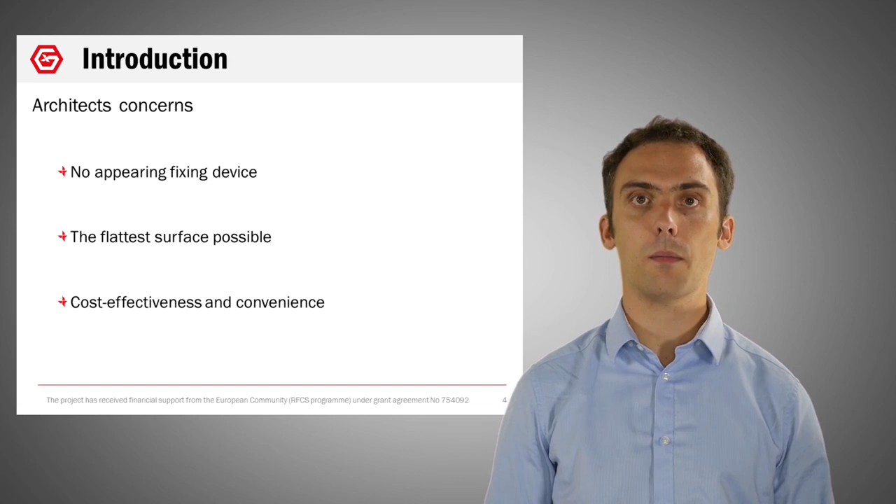Steel is a light, resistant, and competitive material. This is why it is so often used in the construction industry, particularly industrial and agricultural buildings. But traditional steel envelope products suffer from this cheap industrial image. To provide solutions for higher quality or premium buildings, architects asked manufacturers to work on solutions offering no appearing fixing device and the flattest surface possible. This had to be done while preserving the cost effectiveness and convenience of steel products they liked for industrial and agricultural buildings. They wanted the cheapest profile possible for their building to project the most upscale appearance.

Another advantage of using steel is that this material offers numerous possibilities for the realization of the joint, especially compared to the only tongue and groove wood permits. Here are some examples of the most common joints you can find on steel interlocking planks.

Chevron joint is the simplest shape of joint for interlocking steel planks. Clip joint is one of the most common and resistant shapes of joint. Lock joint enables realization of chained joints that can be asked by architects. And gutter joint is really resistant but not convenient.

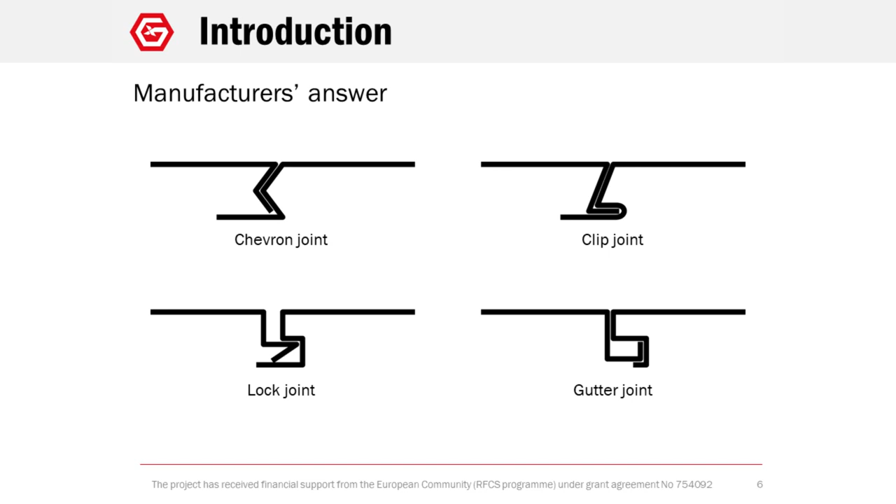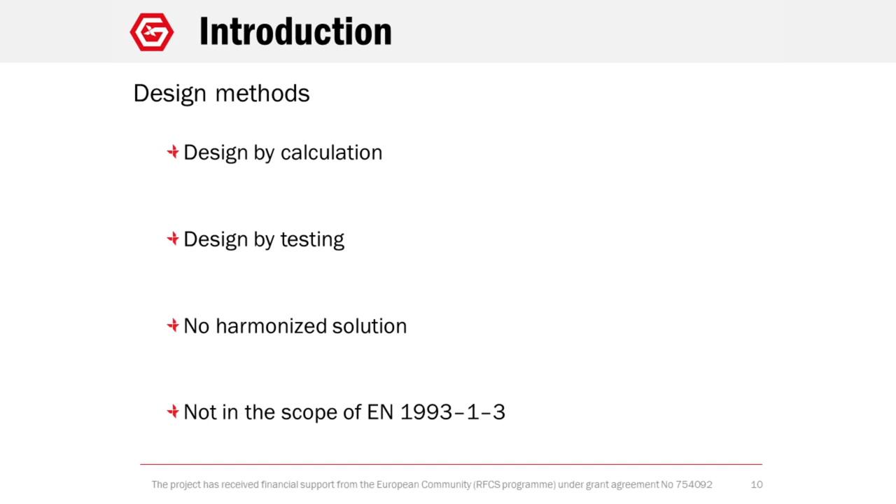During the redaction of Eurocode 3 Part 1.3, these profiles were not included in its scope. Therefore, before the GRISPE and GRISPE Plus projects, no harmonized solution existed at a European level to evaluate their resistance, whether by calculation or by tests.

The tests could be performed in a vacuum chamber or using timber blocks to apply punctual loads with various repartitions depending on the country in which they were performed.

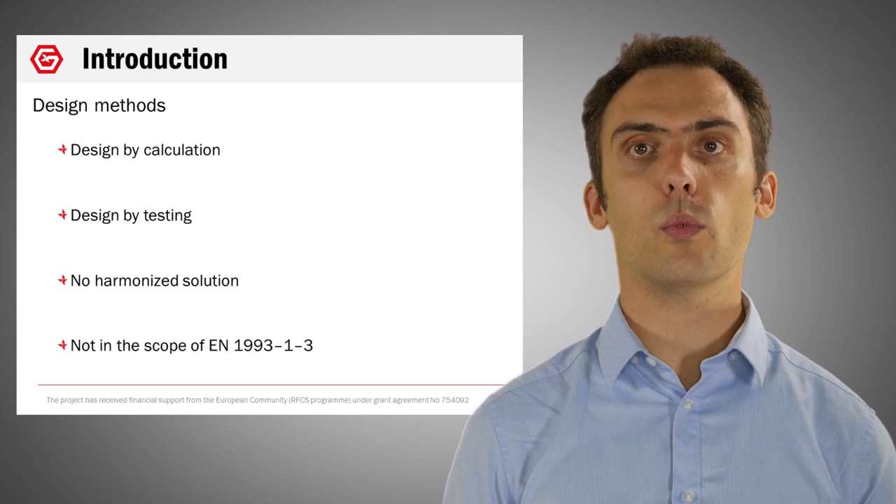Under suction loads, a typical failure mode occurs for interlocking planks. Since only one edge of the joint is fixed, the free edge gradually goes out of the joint, resulting in the dislocation of this last.

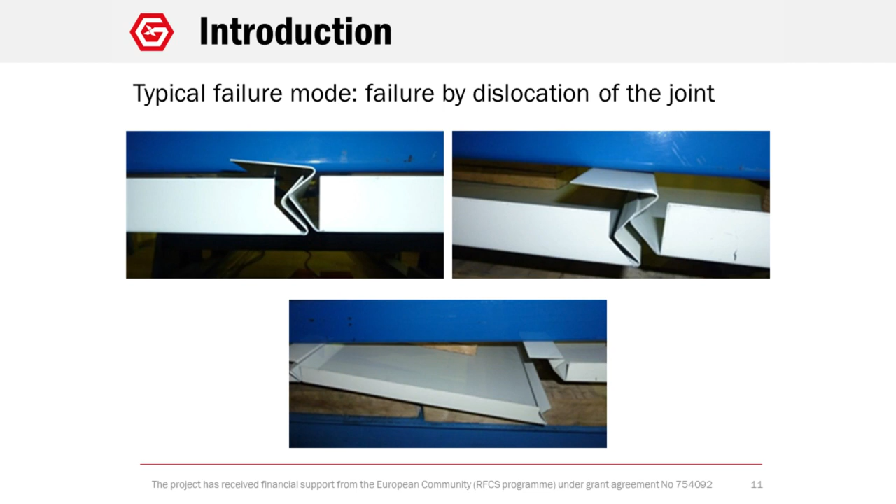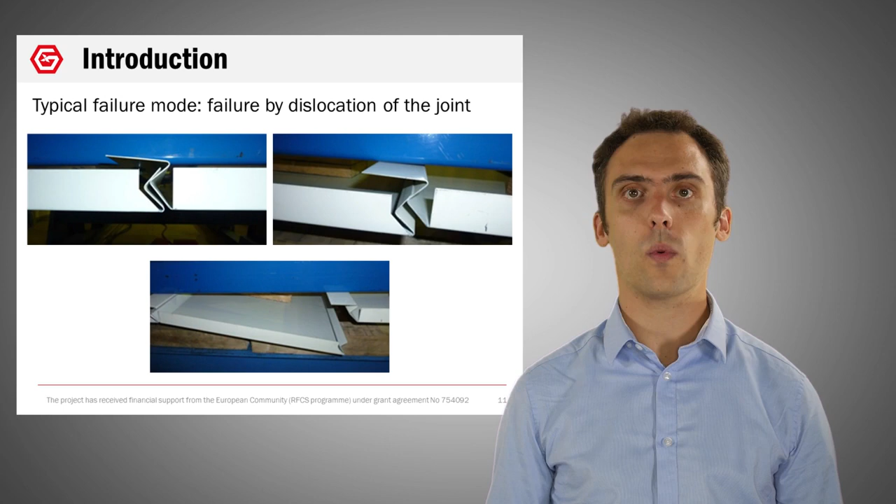This behavior is the most common when tests are performed using timber blocks, even when the span is not so important. We will see that it is not so obvious when tests are performed in a vacuum chamber.

Now we are going to see what tests were carried out during the GRISPE project and what results we used to develop the design method that will be presented thereafter.

Two different profiles were tested within the GRISPE project. The first one is Cladeo 300 from Bacacier. This profile has a useful width of 300 mm for a height of 30 mm.

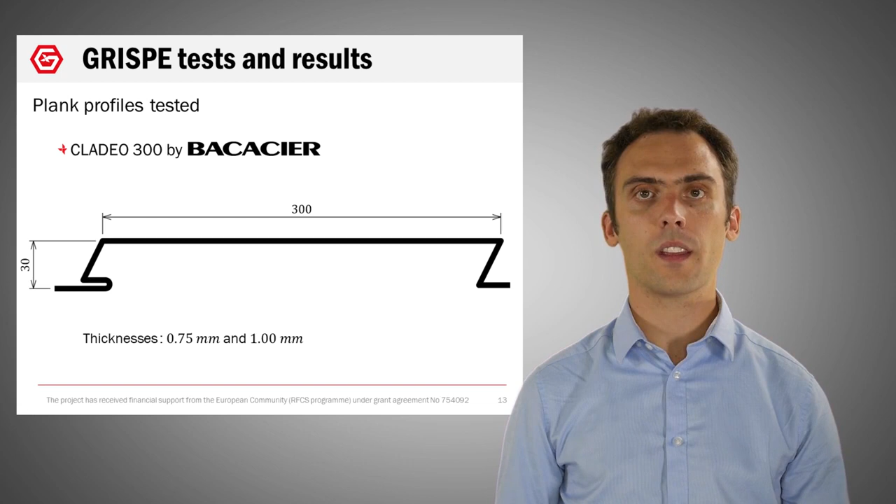All tests were performed in two different thicknesses, 0.75 and 1 mm. The other profile tested was Zephyr 300 from Joris Ide. You can see that this profile has the same dimensions as Cladeo 300. The only difference between the two profiles is the shape of the joint: clip joint for Cladeo and chevron shape joint for Zephyr.

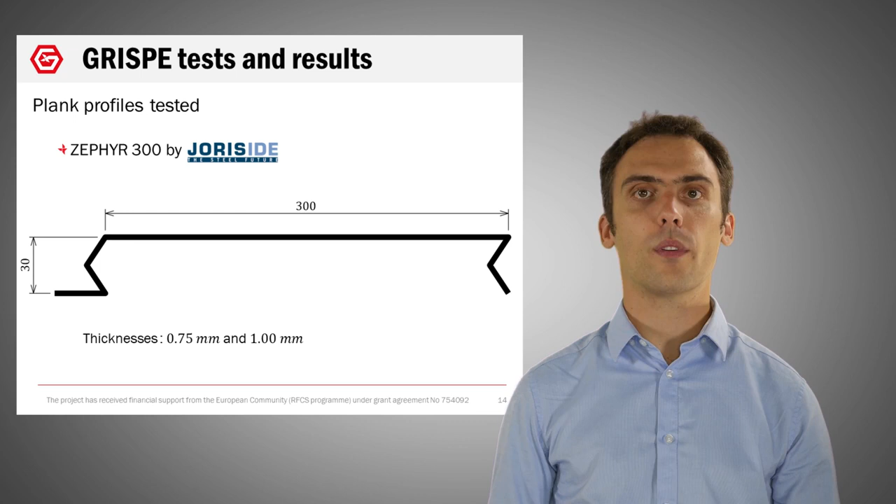These profiles were chosen because they are the most common on the market and because they have the same dimensions. Once again, all the tests on this profile were performed in both 0.75 and 1 mm thicknesses.

Flexion tests were realized in a vacuum chamber as allowed by Annex A of Eurocode 3 Part 1.3. They were performed and analyzed according to this document.

For each test, 5 planks were assembled. You see the sensors that measured both vertical and horizontal displacement. These measures were done on the central plank.

Horizontal displacement was only measured for suction tests. The aim of these measures was to get a better understanding of the dislocation of the joint.

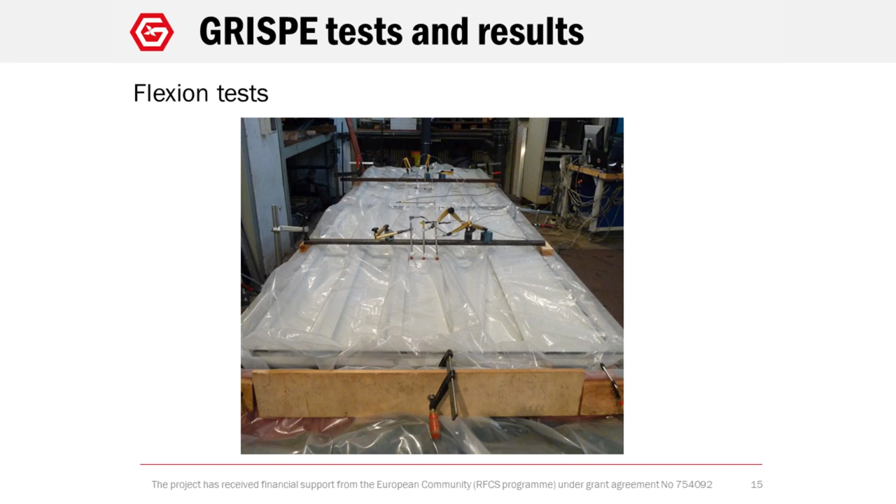Due to the plastic foil needed to airproof the vacuum chamber, the results were unusable. We will see later that we found an analytic way to evaluate this phenomenon.

Another important point is that support reactions were measured by load cells.

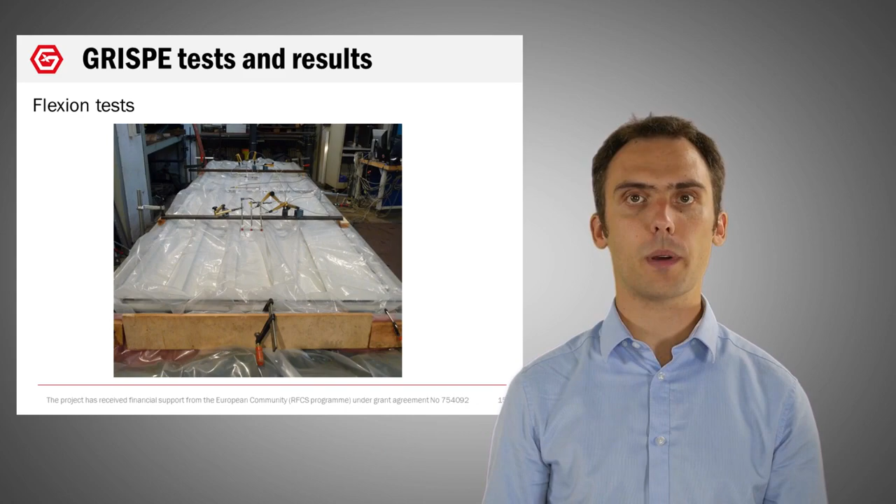The aim of these tests was to develop formulas to get the characteristic moment resistance by calculation.

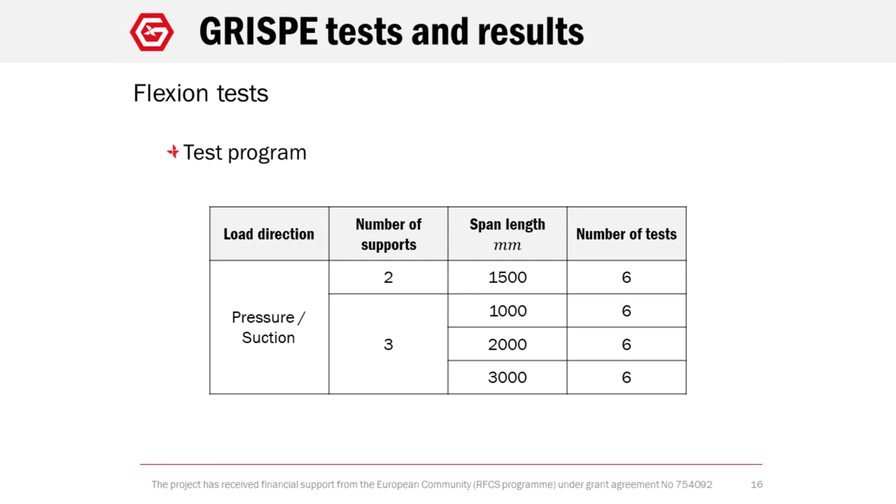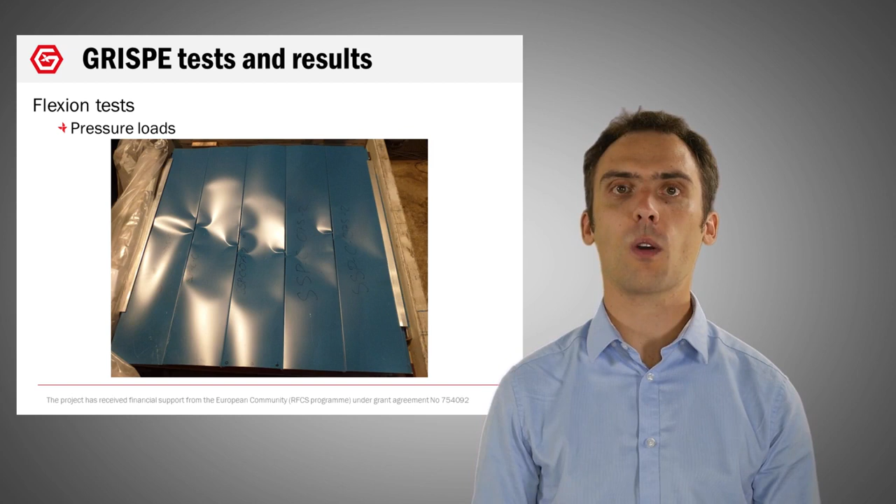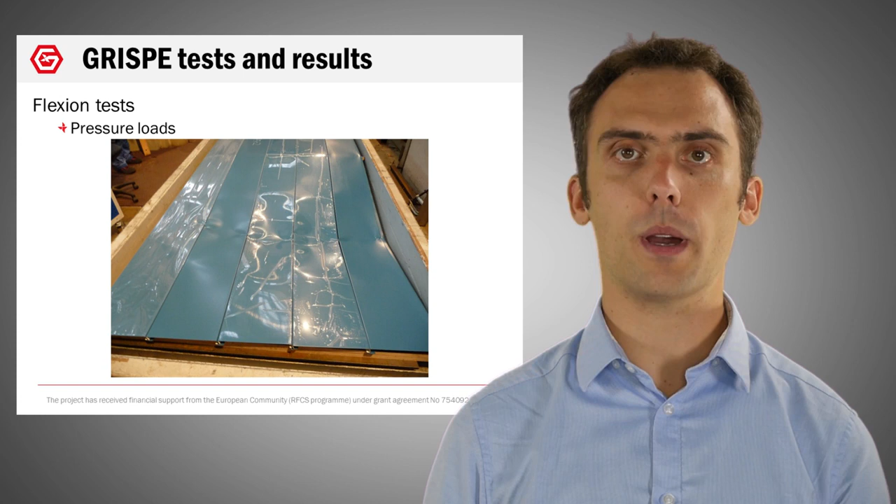On this picture, the failure of a double span sample under pressure loads is shown. Once again, the failure occurred by local buckling of the flat flange in midspan.

For pressure tests on double span configuration with a distance between supports of 1 meter and 1 millimeter thick profiles, the maximum capacity of the vacuum chamber was reached without failure of the samples. You see here that interlocking planks can handle a great deformability before failure.

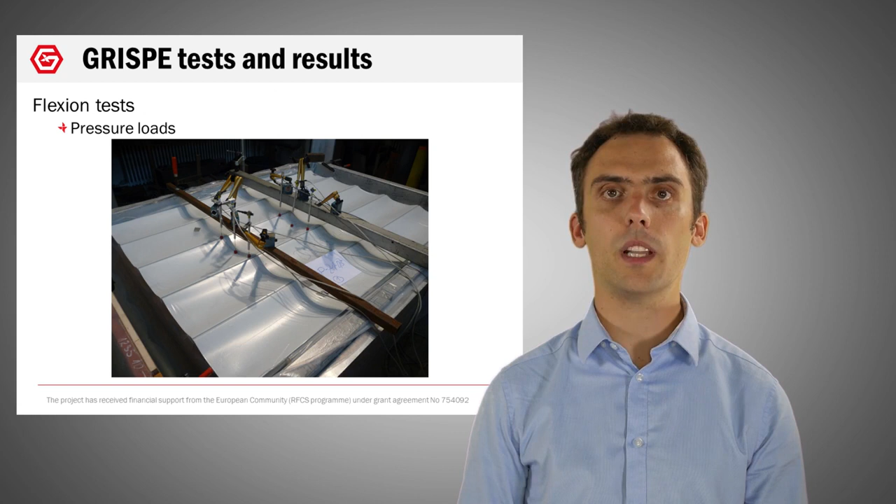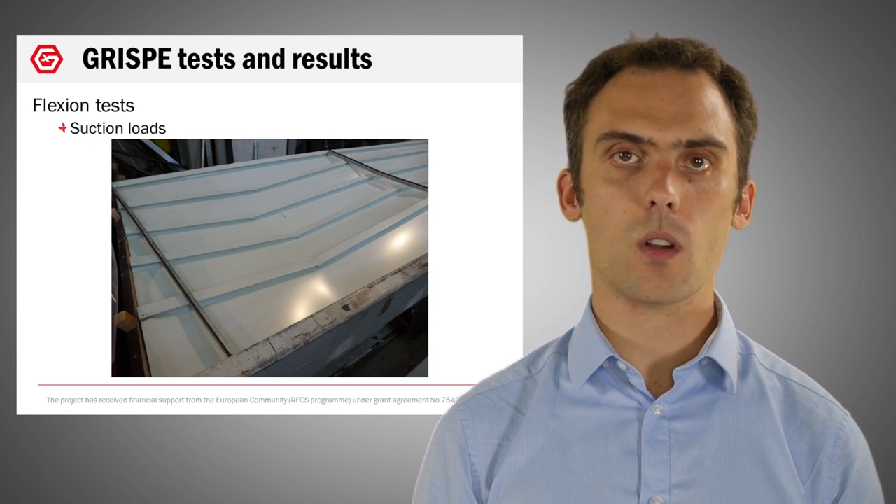This means that when performances are evaluated on the basis of tests carried out using timber blocks, they may be underestimated. Indeed, wind loads are uniform loads, and performing tests in a vacuum chamber is a more realistic way to simulate these loads than to apply local loads by use of timber blocks.

Even if some samples failed by local buckling of the joint, you see now that failure by dislocation occurred on other samples when the load applied was too important.

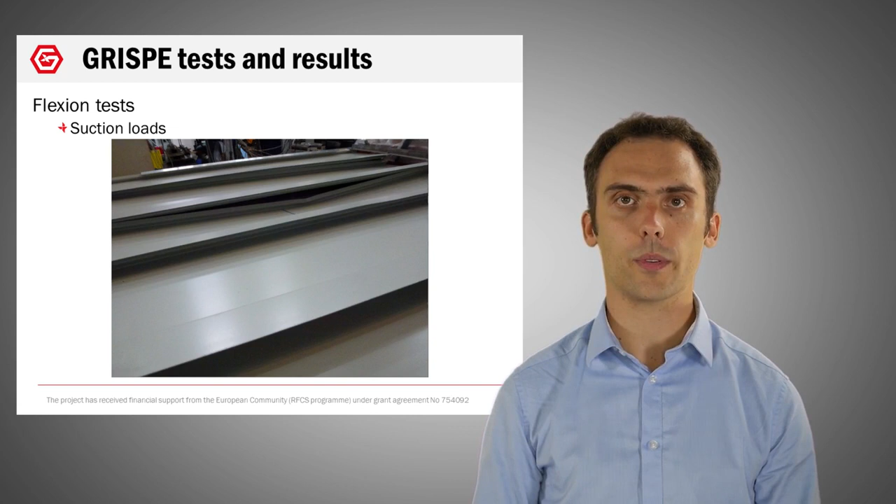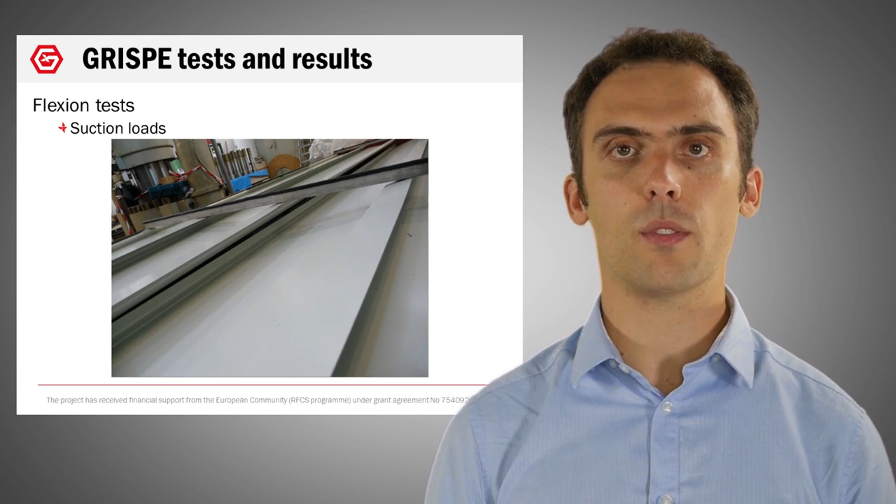On this picture, you see another example of failure by dislocation. We will see later how the maximum bearable load before dislocation can be determined thanks to an analytic approach.

Indeed, the central support reaction measure is about twice the reaction on both end supports, while theory tells us it should be more than 3 times.

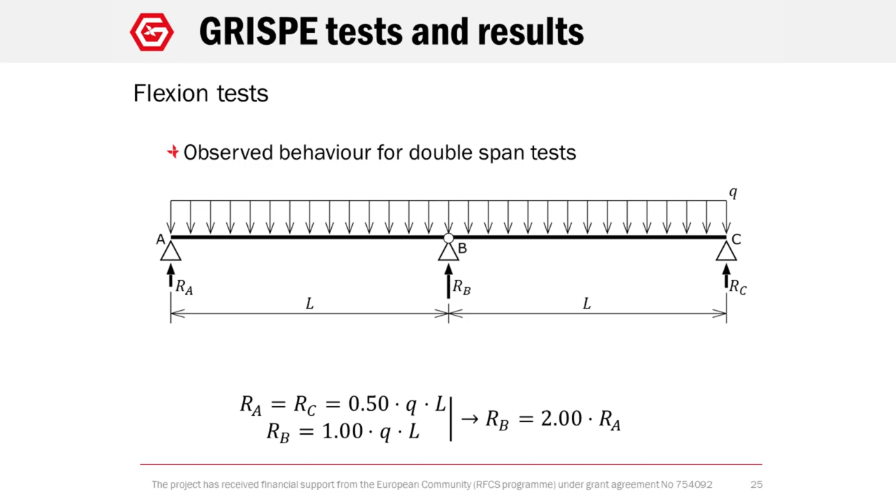End support tests were also realized to see if the actual formula given by Eurocode 3-1-3 can be used for interlocking planks. You see here the setup of these tests.

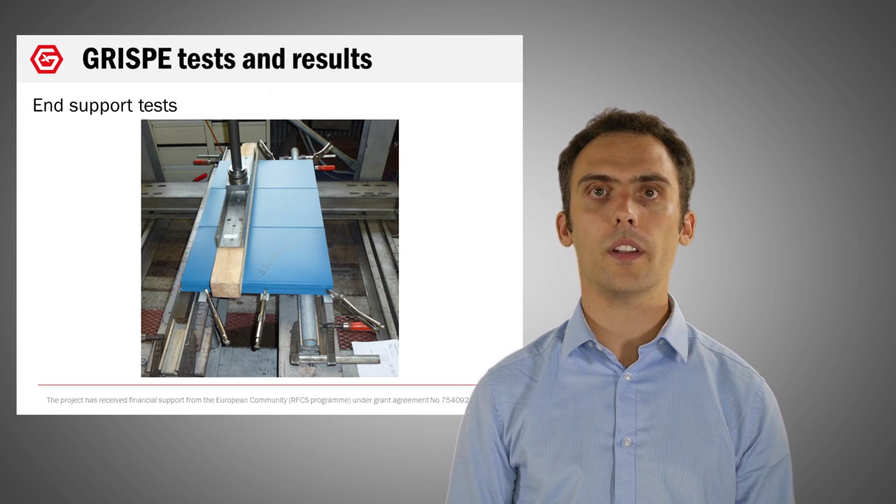3 assembled planks were tested according to Annex A of Eurocode 3-1-3. The test program given here is the one that was performed for both Cladeo and Zephyr profiles in both 0.75 and 1 mm thicknesses.

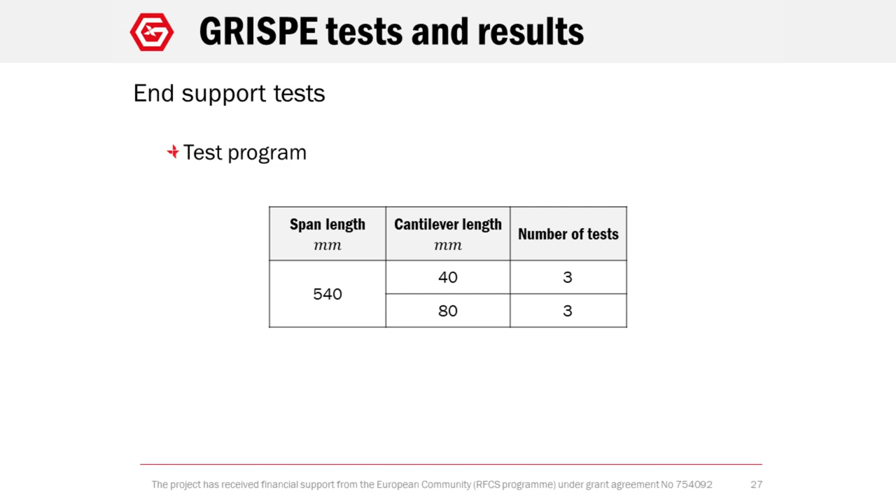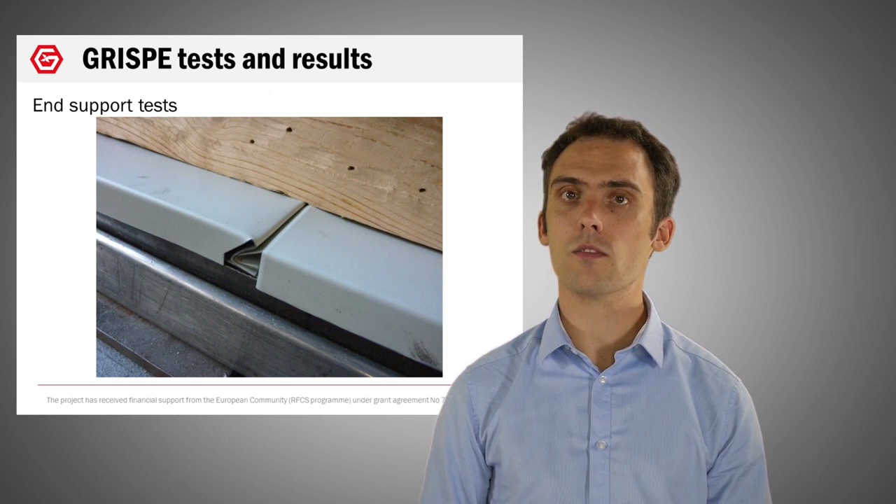Here you see a typical failure by shear effect on Zephyr profile, that is to say on a chevron-shaped joint. The same failure occurred for Cladeo, for clip joint.

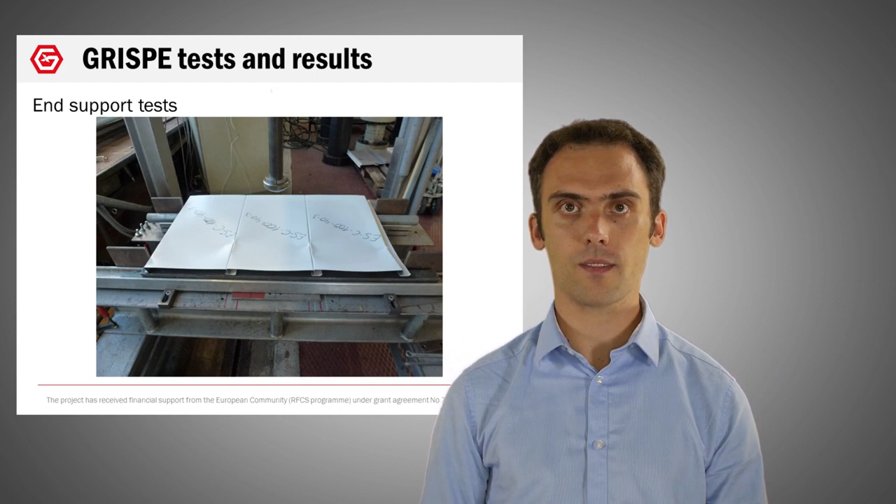Even if interlocking planks are not included in the actual scope of Eurocode 3 Part 1.3, a type of profile sheets close to them is liner trays. Indeed, as liner trays, interlocking planks can be described as channel-type profiles with 2 narrow flanges, 2 webs, and 1 wide flange. But, as seen before, interlocking planks are sensitive to a particular failure mode for which no formula is given: dislocation of the joint.

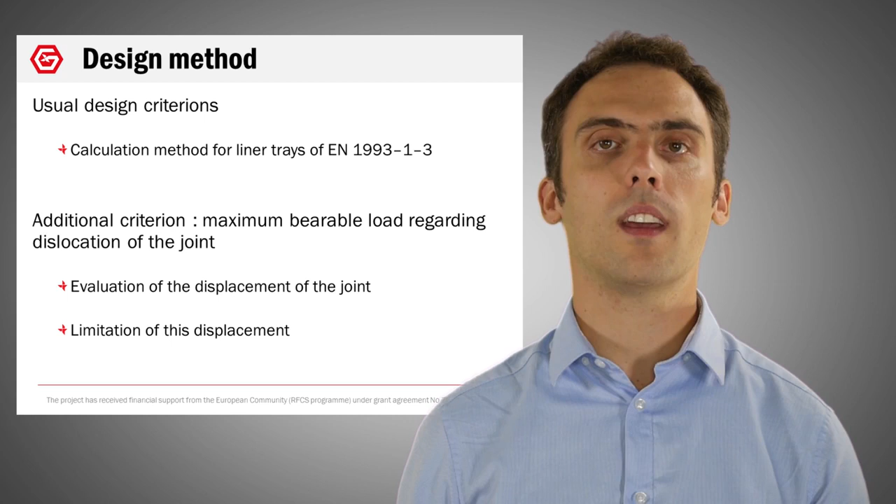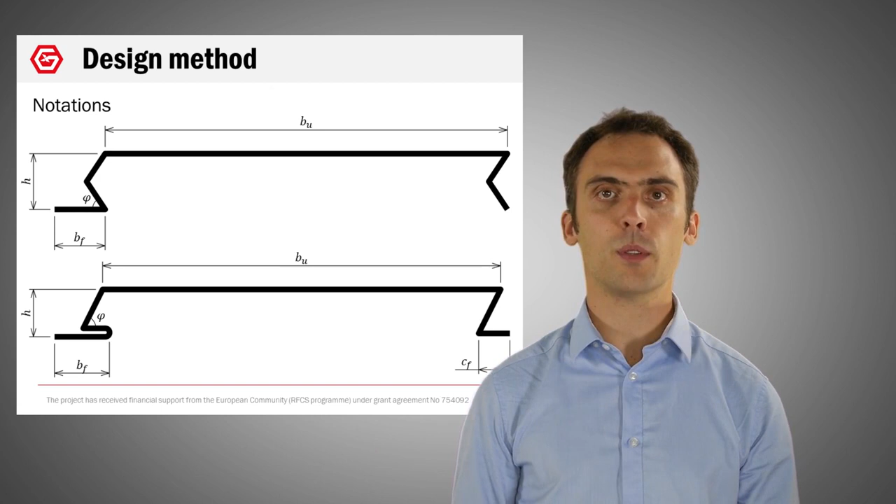Therefore, we developed a theoretical approach based on the evaluation of the displacement of the joint and the limitation of this one. Here are given the notations used in the following formulas for the 2 most common shapes of interlocking planks: chevron-shaped joints and clip joint planks. These are the 2 profiles we tested and included in the amendment proposal we submitted to the European Commission.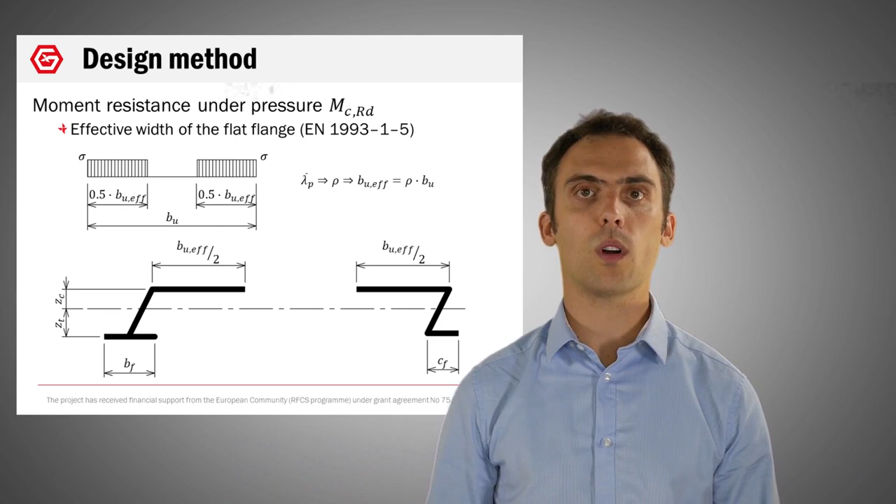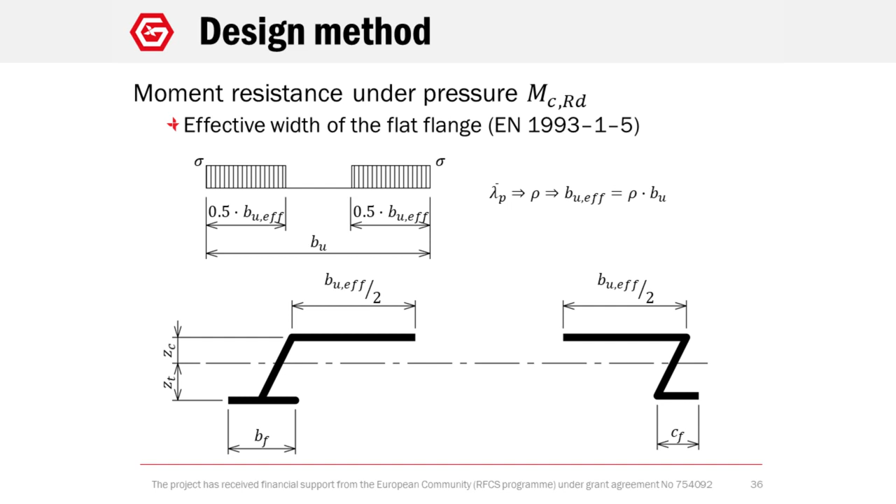Under wind pressure loads, the wide flange is compressed. Therefore, we use Eurocode 3 Part 1.5 to determine the effective part of the wide flange, taking into account it is uniformly compressed and an internal element. Regarding local buckling effect, we thus have to evaluate the slenderness of this flange and deduct the effective width of it. Taking this effective width, we determine the centroid position.

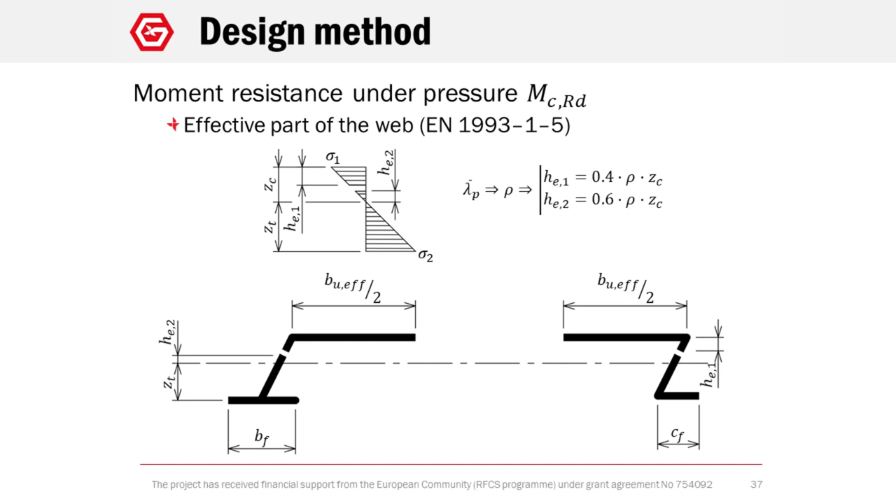Based on the previous centroid position, we then can determine the effective part of the web applying Eurocode 3 Part 1.5. This time, the web has to be considered as an internal element with a non-uniform stress distribution. After the determination of the slenderness of the web, we can estimate the effective height of the compressed part of the web. We eventually can deduct the position of the centroid for the effective section, taking into account every effective part calculated above.

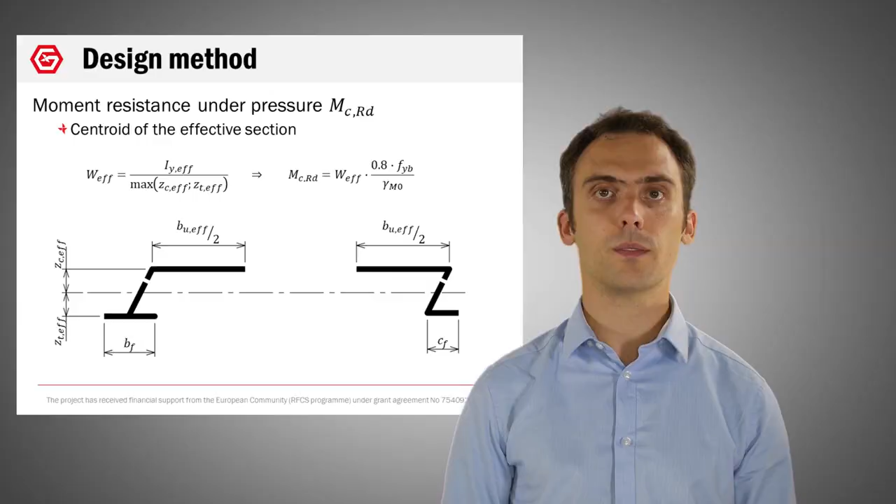Based on this centroid position, we evaluate the inertia of this effective section to determine the flexion modulus and conclude on the moment resistance performance, taking into account that the maximum admissible stress in the section is 80% of the material yield strength according to the actual version of Eurocode 3 Part 1.3.

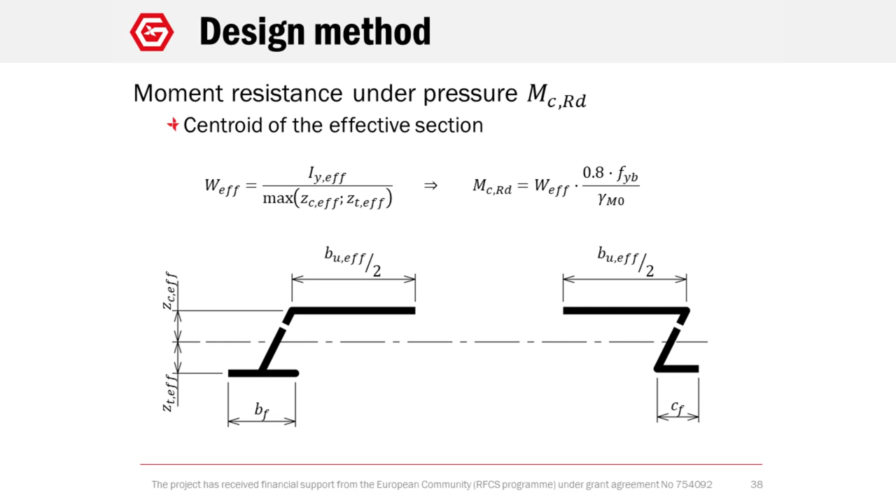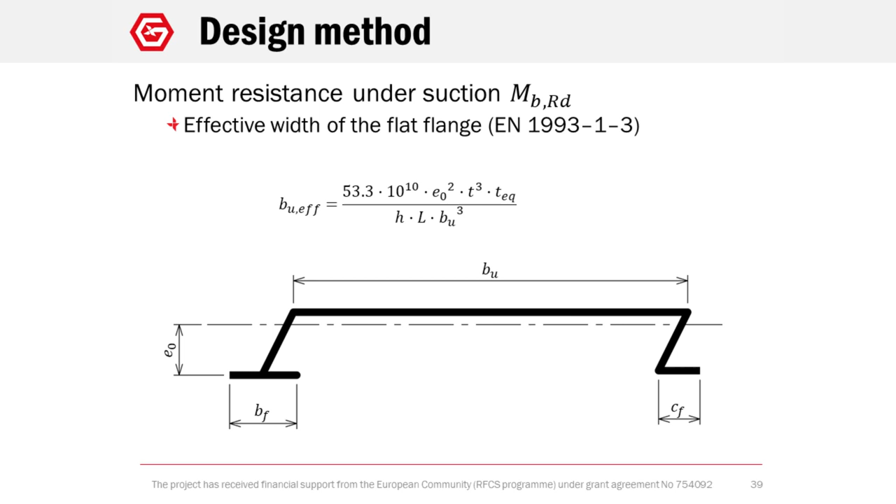Under suction loads, the wide flange is in tension. Eurocode 3 Part 1.3 says we have to calculate an effective width for this flange to take into account specific shear lag effects. To do so, we first have to determine the position of the gross cross-section of the profile E0. Based on this value, we can deduct the effective width of the wide flange.

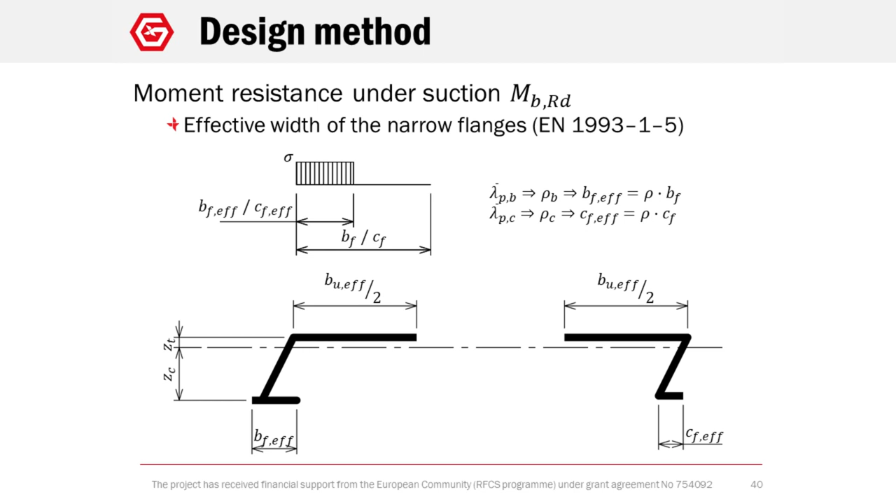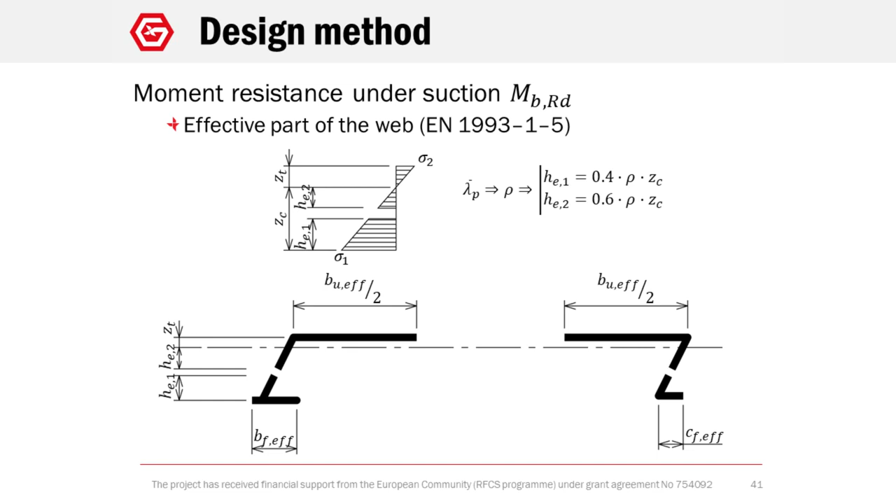As before, we can calculate the effective part of the compressed part of the web according to Eurocode 3 Part 1.5, considering it as an internal element with a non-uniform stress distribution. Of course, the compressed part of the web is, in this case, adjacent to the narrow flanges. Once again, we eventually can deduct the position of the centroid for the effective section, taking into account every effective part calculated above.

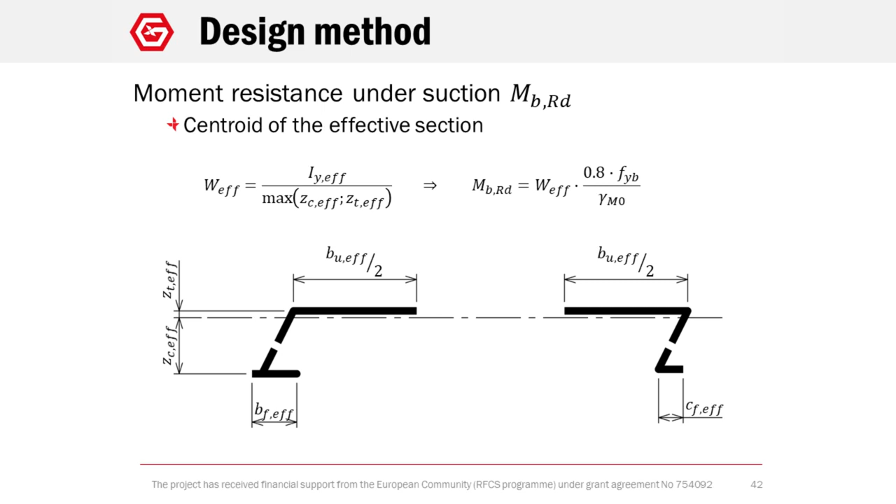Based on this centroid position, we evaluate the inertia of this effective section to determine the flexion modulus and conclude on the moment resistance performance, taking into account that the maximum admissible stress in the section is 80% of the material yield strength according to the actual version of Eurocode 3 Part 1.3.

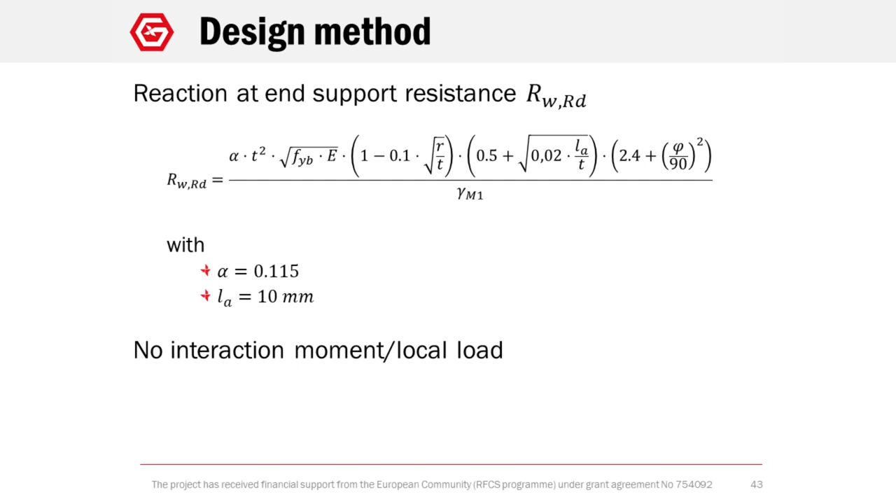For the determination of the end support reaction resistance, the actual Eurocode 3 Part 1.3 formula can be applied. The alpha value has been calibrated according to end support test results. Based on the behavior observed during double span flexion tests, no interaction between moment and local load has to be considered.

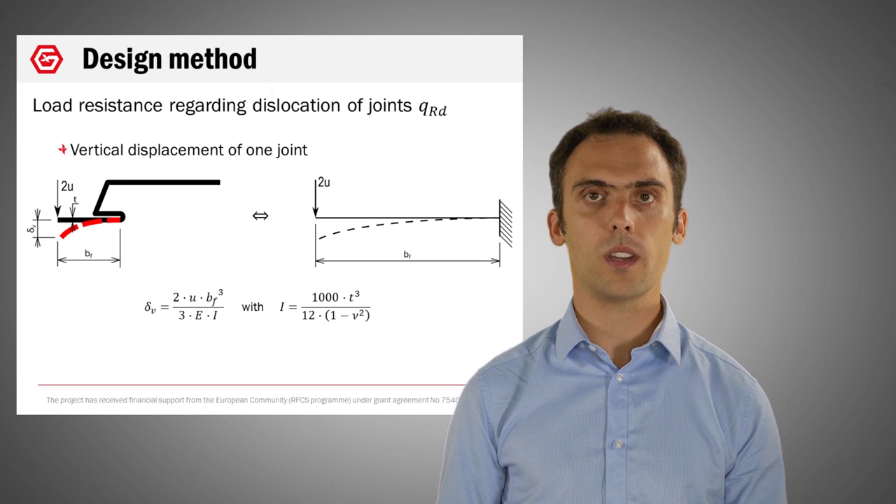To evaluate the maximum bearable load before dislocation, we determine the displacement of the joint based on an analytic method. This displacement is divided into 3 different components, 1 vertical and 2 horizontal. The first one is the vertical displacement in midspan of the fixed narrow flange, considering it as an embedded beam with a vertical load applied on its extremity. Based on this model and on the inertia of a plate element, we can calculate this vertical displacement using the following formula.

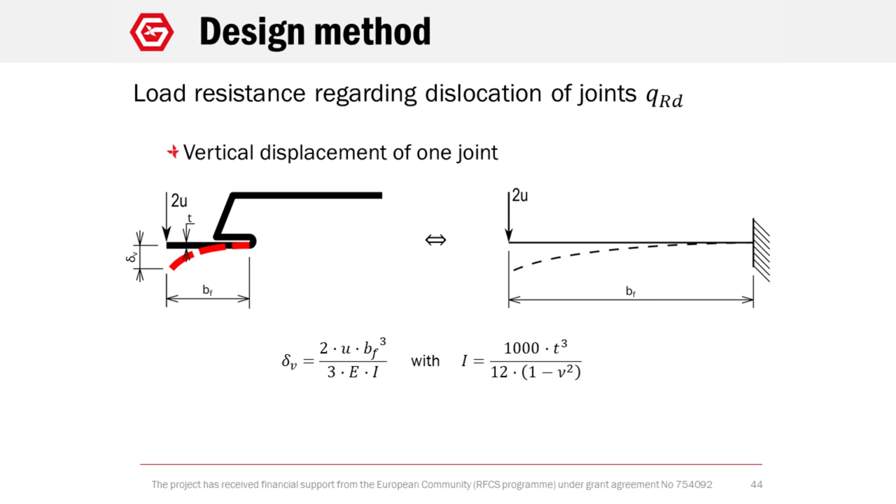The first horizontal component of this displacement is the one resulting from the local deformation of the joint. To evaluate it, we consider the joint as an embedded beam to which a torque is applied on its extremity. Once again, the inertia used in the formula is the one of a plate element.

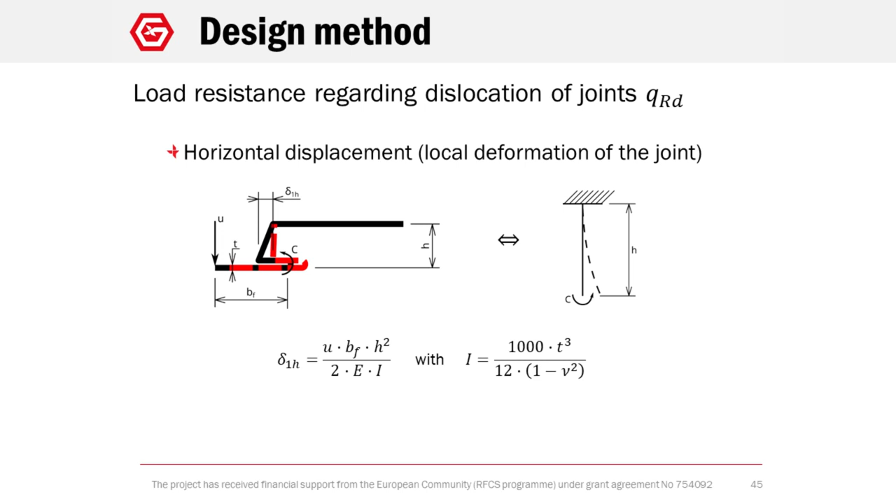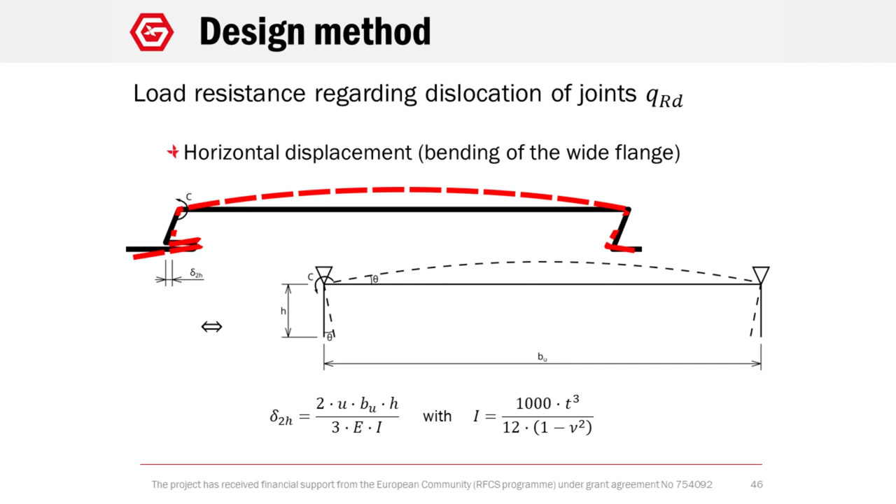The final component of this displacement, and the last horizontal one, is the one considering the bending of the wide flange and conservation of the angles between the webs and the wide flange. Once again, the inertia used in the formula is the one of a plate element. To deduct the total displacement, we superpose each of the 3 components determined above.

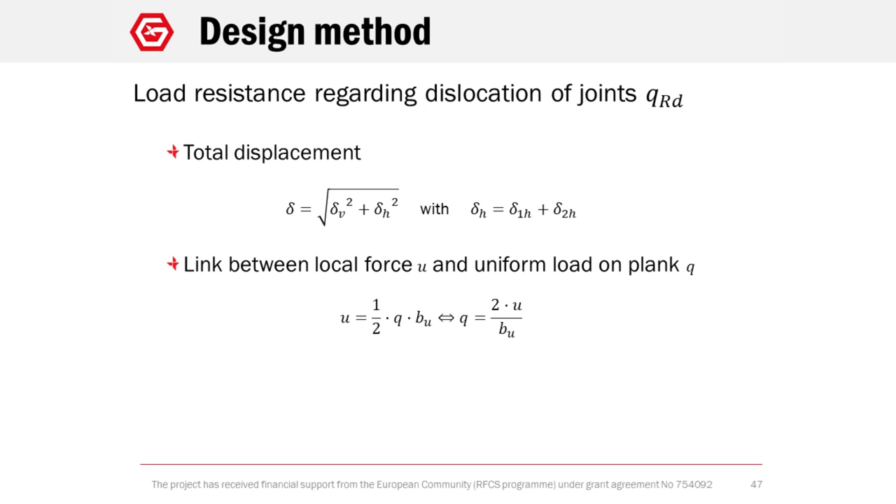The link between the local load U used in the previous formulas and the uniform wind load Q is given there. Eventually, we conclude to the maximum bearable load, limiting the displacement of the joint according to the shape of this one.